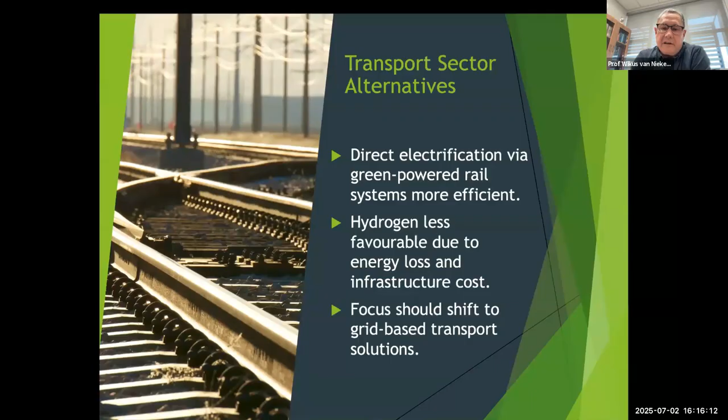So hydrogen is really not very favorable because of the high energy losses and also the infrastructure cost. And therefore, I think there are other solutions in the transportation sector than focusing on green hydrogen as the energy carrier. As I said already, as a storage, it is very costly and inefficient. And there are many other more favorable electrical energy storage systems around, specifically batteries. As we know, the prices have come down significantly. The sizes of the systems have gone up dramatically as well.

And then, of course, also in the South African sense, there are also pumped hydro systems, which is probably one of the best batteries for electricity that we have around. But it is always true that in certain cases, there will be some niche applications for hydrogen as a storage of energy.

We also frequently hear that countries like South Africa and Chile are going to generate green hydrogen, put it in ships and transport it all the way to Europe and to Japan as a way to export our green energy and to green their economy with either the hydrogen or the green ammonia that will be carried around. However, I will say, have these people looked at the map, right? So they're very close to Europe.

North Africa, there's a country called Morocco. If you go to Morocco, you will find that they have a very, very well-established renewable energy sector, probably even more established than the one that we have in South Africa, but I think we're slowly overtaking Morocco these days. And it's much easier for Europe to source their green hydrogen from a country like Morocco than all the way from Chile. And with these things, people will really look at the cost and the supply chain.

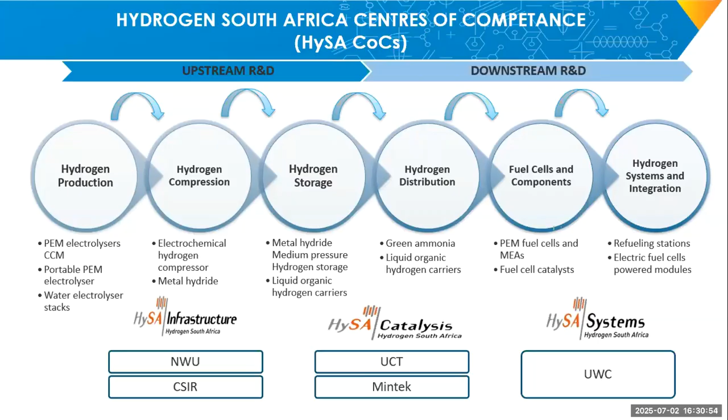So this is a build-up in terms of the intellectual property rights that we have built through these competencies and the competitive advantage that we've built through the support of the HySA program. You would see that in terms of IP granted and patents filed through the different thematic areas, as I've indicated, we've got IP mainly focusing on hydrogen metal hydrides. We've got IP when it comes to fuel cell stack clamping systems.

We've got IP when it comes to fuel cell components. We've got IP in liquid organic hydrogen carriers, in catalyst-coated membranes, in membrane electrode assemblies, and in a PGM-based catalyst. And what is the beauty about this IP portfolio that we have built? These patents we have filed in over 14 countries, obviously including South Africa as well.

But the beauty that we always want to highlight when conveying the message that South Africa has a competitive advantage to participate competitively in the production of green hydrogen and green ammonia is that confidence is informed by the very fact that at least 70% of the IP reflected in this slide is linked to commercial products.

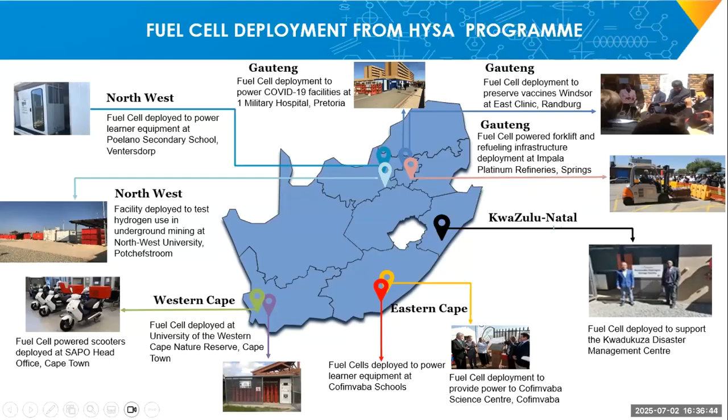So in terms of the Hydrogen Society Roadmap, we've supported the Hydrogen South Africa program, the HySA program, since 2007. So we had to take a reflection. Around 2019, when we did a second HySA 5-year review, we said, how do we try and ensure that we implement or create a conducive environment that will fast track the commercialization of these intellectual property rights that are based on publicly funded IP.

So we had to reflect and also say, what else can we do to ensure that this IP that has been supported by government also contributes to the sustainable manufacturing capability of South Africa, and also contributes to the commercialization aspirations of South Africa when it comes to the hydrogen economy. So one of the key recommendations was that we need a broader strategy, a policy strategy that government can support.

And that broader strategy will then guide how South Africa transitions towards the hydrogen economy, and it gives us clear indications in terms of the key action items that we need to support if we want to advance the hydrogen economy agenda of South Africa.

That is when we, as a department, led the development of the Hydrogen Society Roadmap, which was then approved by Cabinet on the 14th September 2021. This is a blueprint policy document that guides the country on how we create an inclusive, sustainable, and competitive hydrogen economy by the year 2050, with the goal of achieving a just and inclusive net carbon zero economic growth for societal well-being. So that's the vision of the Hydrogen Society Roadmap.

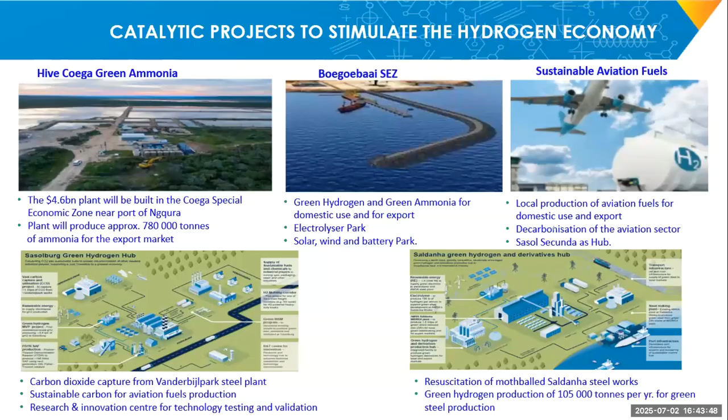One of the other catalytic projects I identified as part of the support for the Hydrogen Society Roadmap is what we call the Platinum Valley Initiative. That initiative is driven through the Department of Science, Technology and Innovation, supported by Anglo-American, ENGIE, as well as an SMME women-led company, Bambili. We've been supporting this since 2021, where we supported the establishment of a feasibility study which identified nine projects across the mobility, buildings, and power sectors, where we can support the advancement of the envisaged establishment of a hydrogen valley corridor, starting from the Gauteng N3 corridor through Mogalakwena mine through the Richards Bay port.

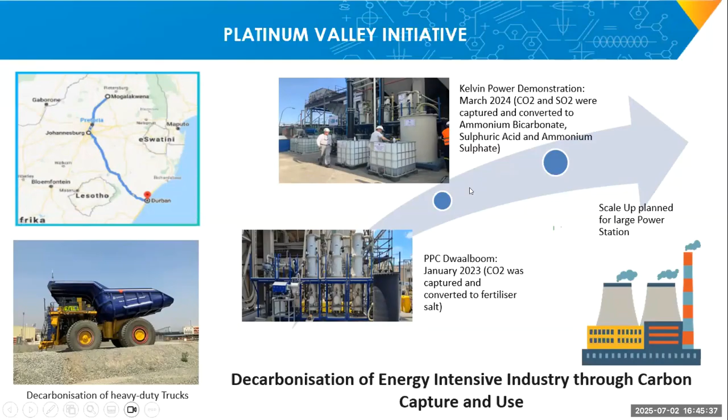We're saying those catalytic projects try to support the implementation of hydrogen cluster related projects that can support the integration of locally developed IP across those hydrogen cluster projects. Part of the Platinum Valley Initiative, we're also connecting it with supporting one of the flagship programs supported through the department, the Carbon Capture and Utilization Program, where we believe that through integrating locally developed capabilities when it comes to green hydrogen and green ammonia, we can link the two initiatives to ensure we support the hydrogen economy agenda that can really contribute to the high-level key outcomes government has set for itself.

This slide gives you our efforts now when it comes to establishing strategic key relationships with critical OEMs, original equipment manufacturers. A clear example is our partnership through the HySA Infrastructure Northwest University with Toyota South Africa, contributing to one of the key high-level outcomes of the Hydrogen Society Roadmap, which is the decarbonization of the transport sector. This partnership is about the development of a mobile refueling station that can refuel the Toyota Mirai vehicles supported through Toyota South Africa.

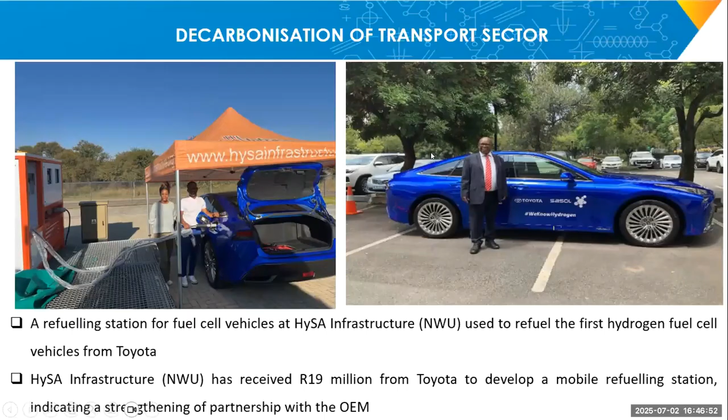We have already deployed, or completed the deployment of, this mobile refueling station, which in the next coming few weeks will be launched and handed over by our minister to Toyota South Africa. We will definitely send out invitations when that happens to everyone interested to come and witness, participate, and support us in that initiative.

Part of the other work we're doing is through Mintek, creating that manufacturing capability when it comes to membrane electrode assemblies and catalysts that can then be integrated in fuel cell systems.

Through the leadership of Mintek, there is a plan in place being driven through Mintek in terms of ensuring that the facility based at Mintek will have the commercial capability to assist the country in commercializing the IP we have when it comes to catalyst and membrane electrode assemblies that can then be integrated into fuel cell systems.

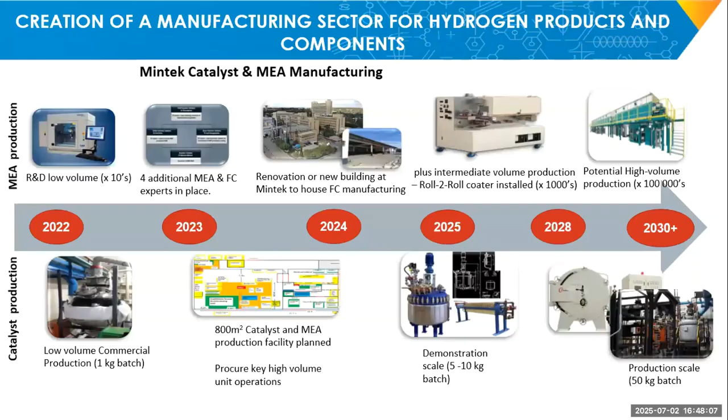So this is just the roadmap and the plan currently being driven through Mintek, in terms of the vision of how by 2030 we would have established a strong, sustainable local manufacturing capability of these components that can position South Africa favorably.

I saw the presentation from the Professor from Stellenbosch University, where he said one of the key enablers is to create a conducive policy environment that will attract favorable investments from investors. One of those favorable policy enablers we're trying to implement is the Interministerial Committee on Hydrogen Economy. We believe this is a committee structure that will assist with the alignment and coordination of key efforts being driven from the different departments.

Because one of the challenges mentioned while engaging with key stakeholders is that currently the system, from the government perspective, is very much segmented. You find there is an interested stakeholder or investor that wants to support a large-scale hydrogen-related project, but because of the barriers - the policy, regulatory and licensing barriers - they tend to cause fatigue and discourage potential investors.

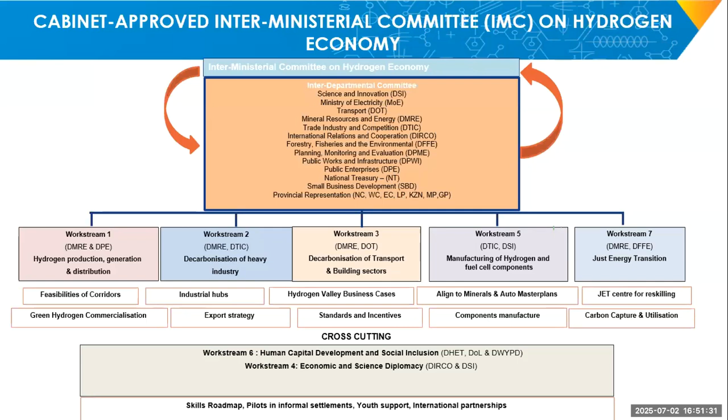And we assumed that membership in November 2023, led by our minister. And this is a structure that we believe we are utilizing to really align our efforts to ensure, because as government, we always want to make sure that whatever decisions we make, they are decisions that are relevant globally, regionally, and domestically.

So by participating in these kinds of platforms, we align our efforts and ensure that our efforts, when it comes to pursuing green hydrogen and green ammonia related agendas, are aligned to globally accepted standards. So those are the platforms that are assisting us in ensuring that we benchmark our efforts accordingly.

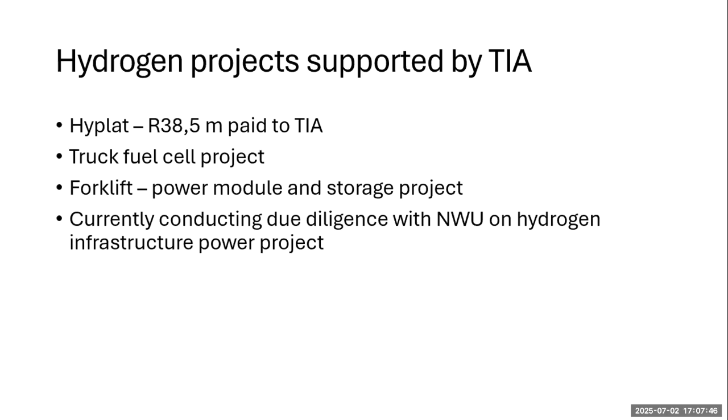Let's take the last presentation, and we'll bring on Dr. Clinton Carter-Brown, the head of technical at Enertrag, South Africa. Dr. Brown, if you may get ready. Dr. Brown provides specialist technical support and project, program and organizational management services in the area of energy systems, energy modeling, utility asset management, power system simulation, electrical grid planning and design, power generation procurement, and grid integration.

So Clinton has held senior leadership roles in the energy domain in the public and private sectors. He spent 18 years at Eskom. Thereafter, he joined Aurecon, and thereafter he worked at the IPP office and CSIR in the energy research sector. Clinton is now with Enertrag, South Africa, as head of technical. Let me hand over to Clinton.

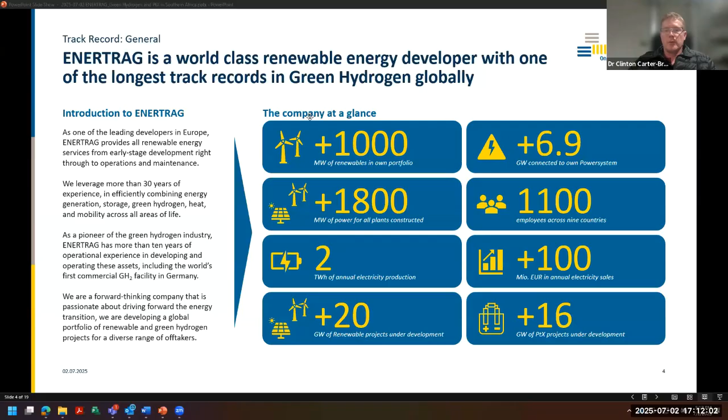Apologies for that. So maybe just briefly then, in terms of the previous slide, Enertrag at a glance, because these slides will be available, audiences are welcome to go through them in their time. 16 gigawatts of projects. We've been in this space for quite a considerable period of time. And most recently, whilst we still focus on our core competence, which is primarily wind energy, battery systems, PV systems, there is now a global play into the P2X space.

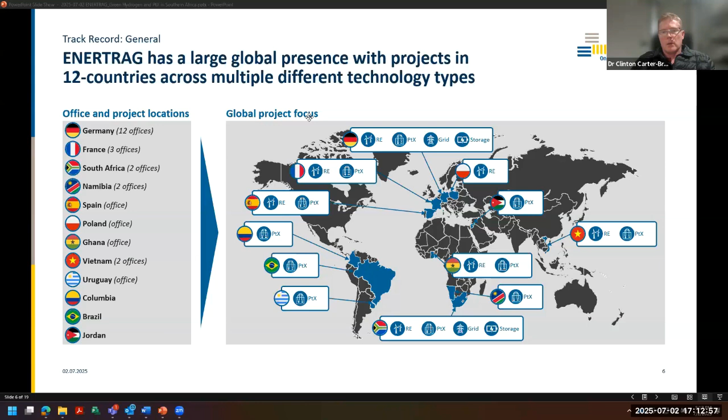One of our key enablers or capabilities is having built and owned and operated our own combined power plant in Uckermark in Germany, something that we started to develop more than 30 years ago. We now have more than 600 megawatts of wind, 21 megawatts biogas. We've got batteries as well as more than 20 megawatts of PV.

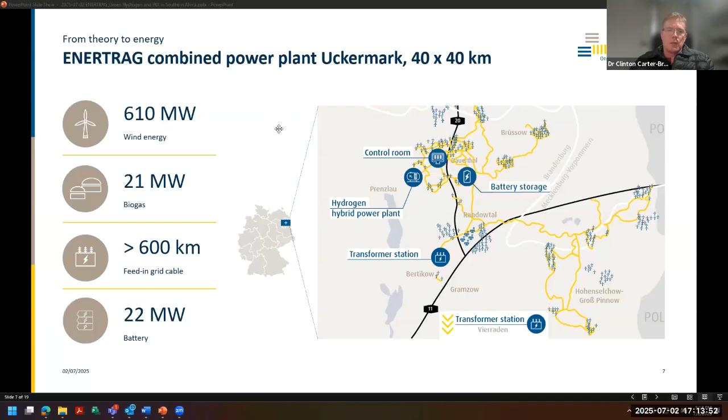And we operate the complete sub-transmission distribution grid, connecting directly at 380 kV into the transmission system, operated in this case by 50Hertz. So we have a deep history of developing large, complicated plants and facilities, which is a prerequisite for playing in the global P2X space, and the technical and commercial complexity that goes with such projects.

As mentioned, we were globally a leader in terms of doing the first commercial electrolyzer project. It's very small; it's under 1 megawatt. Incidentally, when we went to market in those days in 2011, we were unable to secure an acceptable electrolyzer. So we, as Enertrag, designed, built, commissioned, and now operate our own in-house designed, built, and delivered electrolyzer.

So we have that level of innovation and technology development. So it's a facility we're particularly proud of. It's obviously very small scale relative to what's being developed globally, but nonetheless has been a key enabler for us.

In terms of the projects in South Africa, I'm just going to touch on two. There is another opportunity, but I won't be publicly going into any specifics of that at this point in time. Vic has quite rightly mentioned two immediate areas of specific interest in the South African space, and that being green steel and sustainable aviation fuels.

So on the sustainable aviation fuels, we've been co-developing a project with the project partners there being Sasol and Linde for the decarbonization of a portion of Sasol's Secunda facility, which would involve an installation of a fairly substantial wind and PV facility, directly grid interconnecting that into Sasol Secunda to a roughly 200 megawatt electrolyzer that would then feed green hydrogen into the existing Fischer-Tropsch reactors at site at Secunda to produce roughly 42,000 tons of green aviation fuel annually.

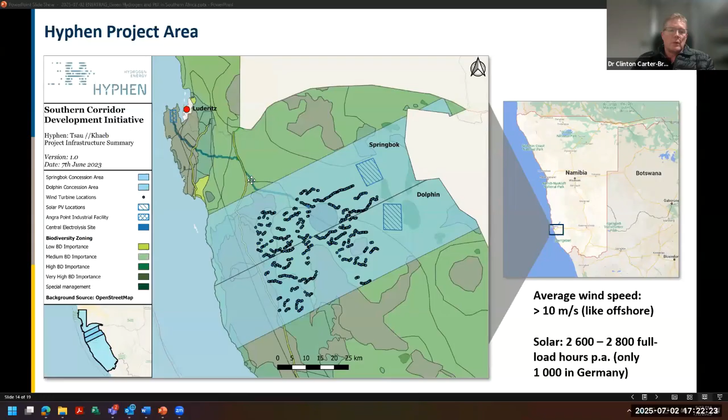What is particularly interesting and exciting about Lüderitz in Namibia, if I go into the next slide, is that the wind and PV resources are globally just simply fantastic. We're talking about onshore wind with speeds in excess of 10 meters per second average, with capacity factors well in excess of 50%. By way of example, the best projects in South Africa are typically high 30s to early 40%, and most of those are now fully developed. So it's a phenomenally good wind resource paired with an equally good solar PV resource, where there is a lot of land mass available, and it's all basically co-located at the Lüderitz port.

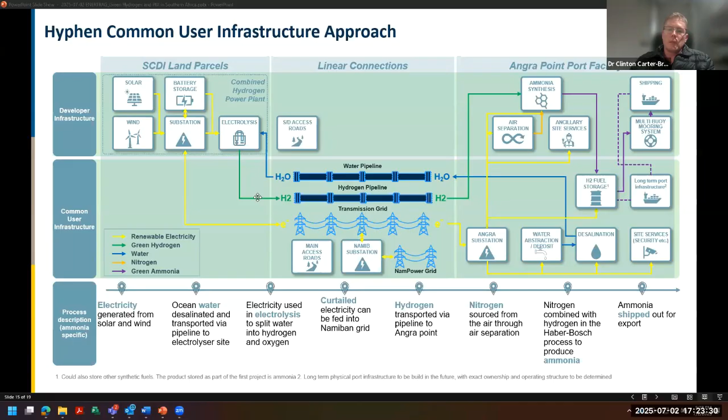It is a completely standalone project, which in itself has a number of challenges given its size. Essentially, we build the solar, the wind, the battery storage, the entire sub-transmission and transmission grid that interconnects a 7.5 gigawatt power system, roughly 3 to 4 gigawatts of electrolysis, the water pipelines, hydrogen pipelines, and transmission grids that move the hydrogen, water, and electrons. Then all of the infrastructure located at the Angra port close to Lüderitz -- the ammonia synthesis, the nitrogen extraction, the port shipping logistics -- we have to build, and we will build all of it, with the overall objective of minimizing the cost of ammonia as it leaves the port and is shipped to its international destination.

We have been appointed through our involvement in the Hyphen consortium for the first two areas, Springbok and Dolphin, which sum to 7.5 gigawatts. Just to give you a sense of the future concession areas and the potential end-state size of this project in Namibia, you can see the dark blue additional future concession areas that could be developed, with the infrastructure we're putting in place -- phase one being sized, and the commercial arrangements, to unlock those future concession areas. So excellent wind, excellent solar, with a large long-term plan that would certainly result in some of the cheapest potential green ammonia globally.

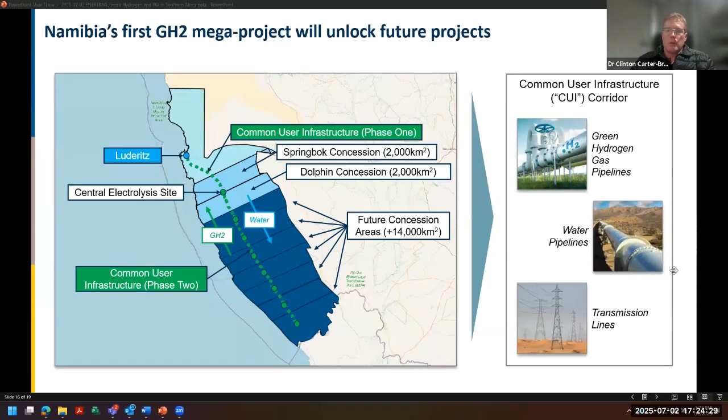So in South Africa, when your renewable energy is remote from your electrolyzer and you need to go via the national grid, you pay wheeling costs. That substantially adds to the cost of projects and negatively impacts the business case. Projects that can build their own grid, avoid wheeling, and are completely co-located, such as Hyphen, already have a substantial leg up compared to projects that have to wheel, which unfortunately would be the case for many projects in South Africa. That requirement or necessity to wheel does introduce a challenge.